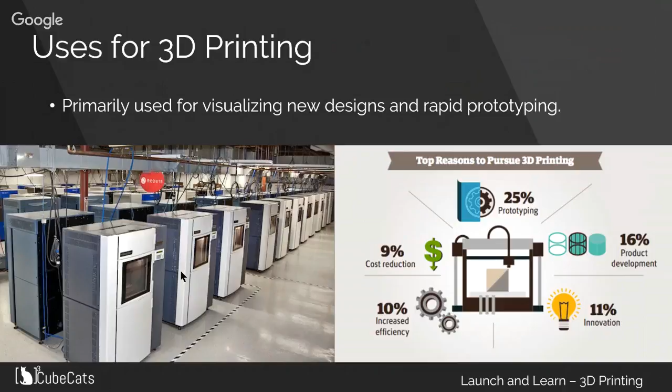So in recent years, 3D printing has become more and more popular, both by hobbyists and also industry professionals and companies. Its primary use has been creating new designs and visualizing them, as well as using it to rapid prototype new parts before they're put into production. On the right side of the slide here, you can see, like I said, 25% of the reasons companies use 3D printing is for prototyping, and the rest are along the same lines of product development and just creating new things fast, quick, and cheap for their company.

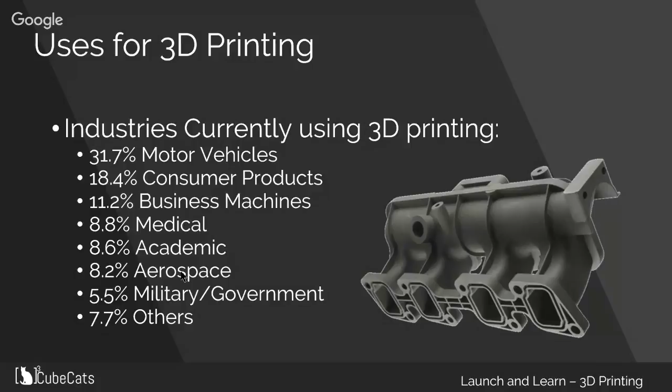On this slide, there's a breakdown of the industries that use 3D printing regularly. On the top is motor vehicles, the automotive industry, which is 31.7%. This statistic, I believe, is from 2015. So since then, it has probably changed somewhat. If I had to guess, aerospace and medical would be much more towards the top, with the integration of it into prosthetics and airplanes and even the space industry.

So there's 6 main types of 3D printing. We're only going to go through the top 3 on this slide, which are fused deposition modeling, stereolithography, and digital light processing. 90% of the time when someone says 3D printing, it'll be one of these 3, specifically FDM, because it's the cheapest. And when you think of 3D printing, you think of FDM.

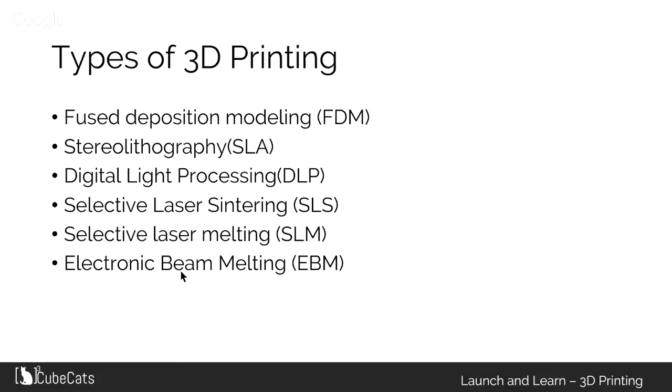So FDM printing is extruding a piece of melted plastic onto a print bed and slowly building up a layer by layer at a time. This was one of the first types of 3D printing, and MakerBot was the company that really brought this to light and brought it from the world of companies and industries to people's houses. And it was the first time people were able to buy this technology and use it in their homes. Accuracy on this is 100 microns or 0.1 millimeters. That basically means the minimum layer height you can have is 0.1 millimeter. Most of the time printing, you use a 0.2 millimeter layer height.

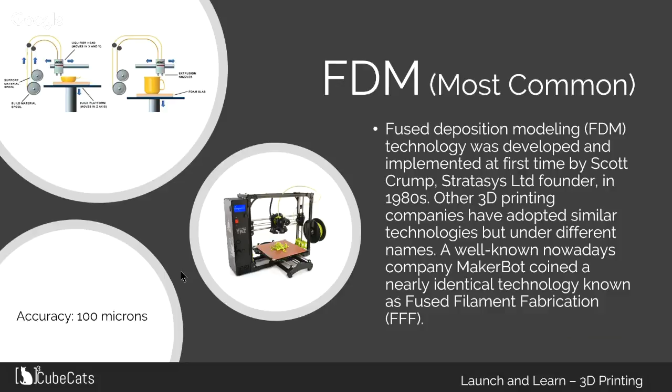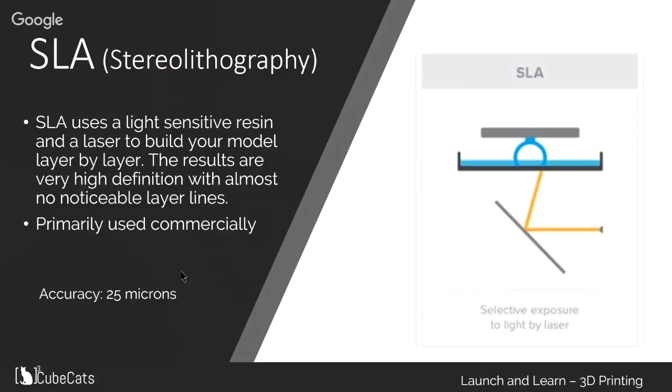So the second type is SLA, or stereolithography. It uses a laser and a moving mirror to shine the light onto the bottom of a clear build surface that's submerged in resin. And when the laser light hits the resin, it hardens and it builds the layer up layer by layer that way. These parts are very high definition and incredibly strong. They're as strong, if not stronger, than an injection molded plastic part. And the accuracy with this type is 25 microns, which is 0.025 millimeter layer height. It's practically invisible when you see it. It looks like an injection molded part.

The last type is DLP, or digital light processing. This uses a UV projector, kind of like SLA, where it shines it onto the bottom of a clear print surface that's submerged in resin. When the light hits the resin, it hardens and the print surface slowly moves up and basically pulls the object out of the resin. It is a little bit less accurate than SLA. However, it is much faster, and the accuracy really depends on the projector you have. So very expensive commercial printers will have very expensive projectors which have a lot of accuracy, whereas if you buy a cheap desktop DLP printer, you might not have the same accuracy, but it'll still be much better than FDM printing.

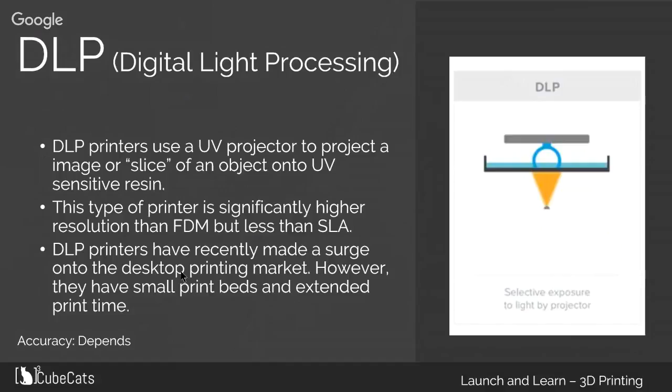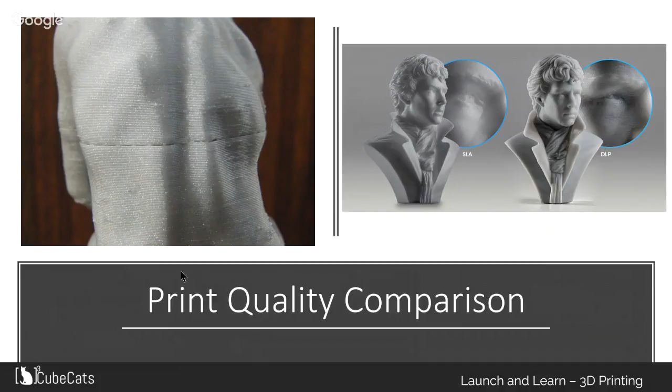On this slide, I have a print quality comparison between FDM on the left and then SLA and DLP on the right. With FDM, you can see the characteristic layer lines of plastic, and then you can even see lumps and other imperfections caused by the nozzle moving around or other various setting issues. In the middle, there's SLA, where you can see the practically invisible layer lines. And then DLP is on the far right, which has a little bit more distinguished layers, but it's still much better than the FDM prints.

So since FDM is the most common type and the type that everyone associates with 3D printing, that's what we're going to talk about the most during this presentation. There are two main types of FDM printers, Cartesian and Delta printers.

Cartesian printers use an XYZ straight axis, and they move the print bed and extruder accordingly. These are by far the most common, and a majority of the kit printers you see, such as the Prusa, are all Cartesian because they're very simplistic and easy to assemble, and the settings are much more understandable than Delta printers.

Their build volume is usually a square, and they can have much larger build volumes. However, they can't go as tall as Delta printers can. Delta printers usually print in a cylinder and much taller. However, the settings on them can be a nightmare, but when they are properly configured, they can have as good, if not better, print quality than Cartesian printers, and they can print much faster.

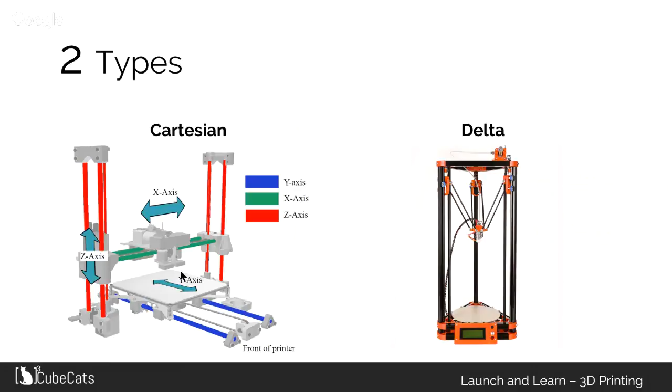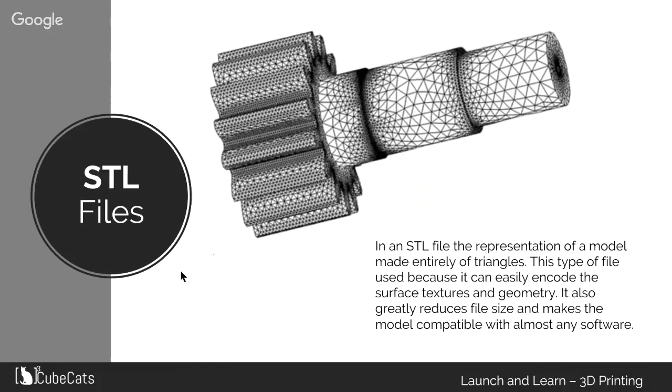So before we get any further, let's take a minute to talk about the file type that a majority of 3D printing softwares use, which is the STL file. STL is short for stereolithography, and it is essentially a model that is broken up into many little triangles. This is used because it decreases the file size while keeping the surface geometry and textures of the model, as well as it is easier for the slicing software to slice it into layers and then print it.

So there are a lot of different slicing softwares out there. Some of them are proprietary to a certain brand of printer. Other ones are open source. They all have their unique attributes, and a lot of different people like them for different reasons. In our lab, for our printer, I believe we're going to be using Repetier, which is a free software. It is relatively simple, but it also gives you enough options that you can fix problems in your prints, and you can customize the G-code to print it however you would like.

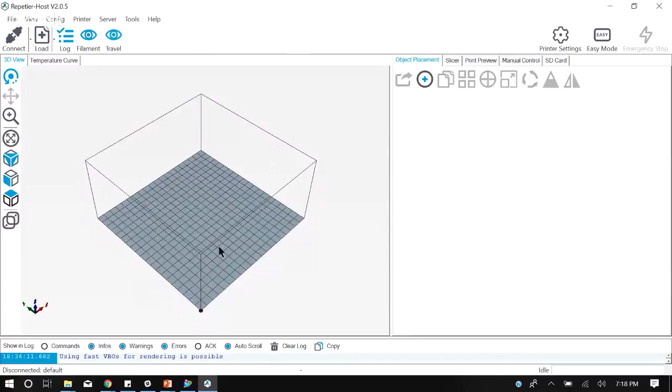So I'm going to pull up Repetier and do an example of how you would slice a file. So once you come into here, you can see you have the 3D viewer, where this square would be your print bed. And then you can add a 3D object.

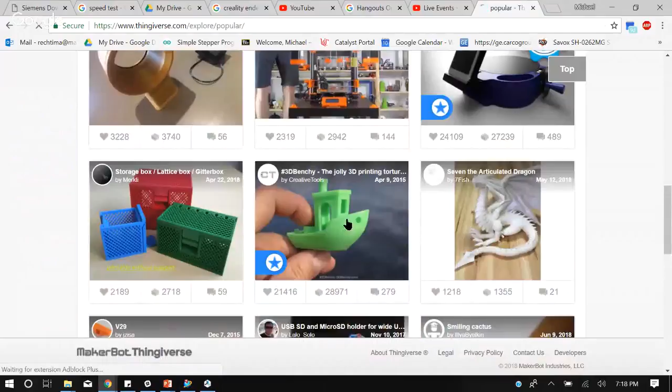So for this, you would either import your design that you just built in a CAD program, or you could go to a website such as Thingiverse or any other site where you can find 3D models. Another example is McMaster-Carr, where you can find any file ever for any fastener or pretty much anything. So this is Thingiverse. It's kind of like a social media platform for 3D printing. We're going to download this boat design.

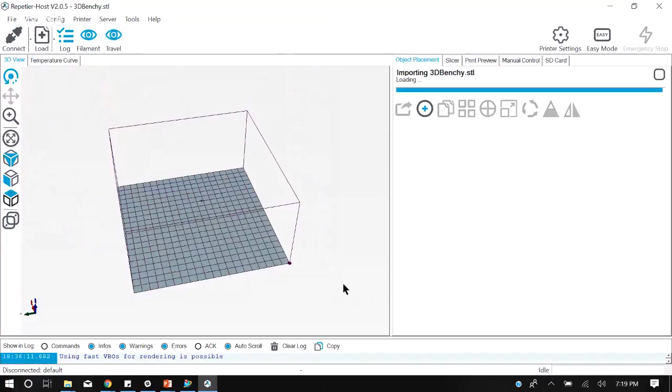And then slice it. So we're back into the slicing software, and we can open up that boat. So once you have the file placed onto the print bed, it should look just like it looked in the CAD program. If it doesn't, then you have to go back and fix it, or go through manually and fix the STL file, which takes a lot of time, but sometimes it's required.

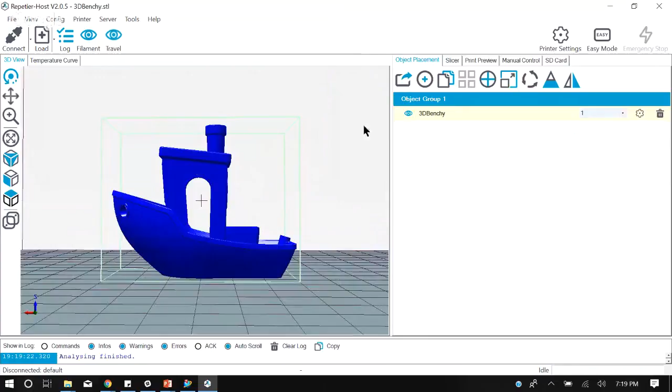And then you can go over to the slicer tab, and we're going to slice with the Cura engine. This software offers two options. You can slice with the Cura engine or slice with a program called Slic3r, and each one gives you different results. It depends on your printer which one works better, but we're just going to use Cura for this. And then through here you can change the print settings, and if you go into configuration, you have even more print settings.

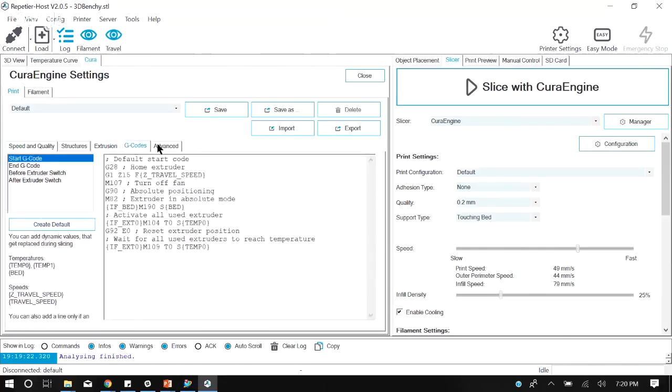As I'll say further on in the presentation, 3D printing is 10% hardware and 90% settings. If you have your settings right, you can get just as good a quality with a cheap printer as you can a good printer with bad settings.

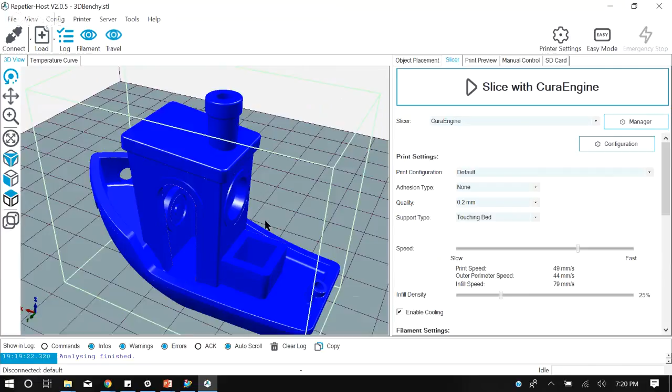Once your model's in and you are happy with it, you can slice, and it will give you a little progress bar, and then it will supply you with a sliced view of your model, and then the print time, layer count, total lines, the amount of filament it will need. You can actually customize it to also tell you the price of filament based on how much you pay for the filament.

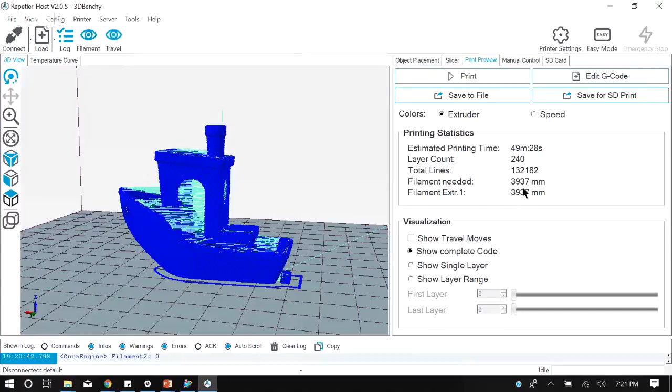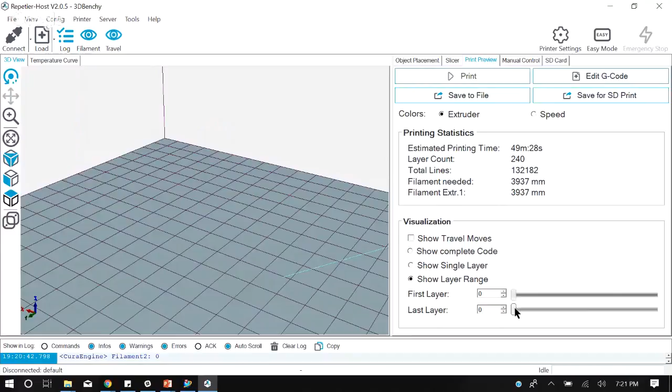There's a couple different views. This is the complete model. We can have it show a single layer. So as you drag it up, it will show us each layer all the way up to the very top, or show a layer range. So this will show it as you build it, and you can watch it build itself up just like the printer will do.

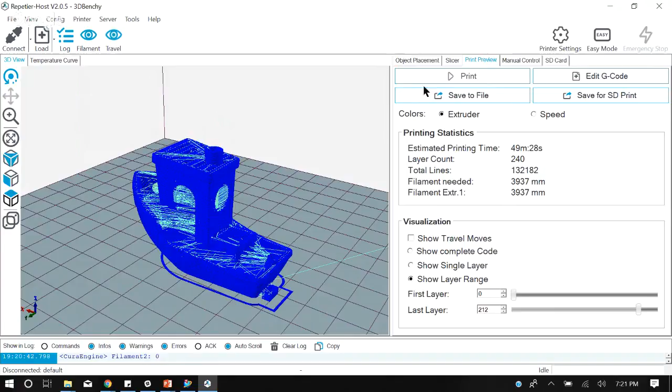Once you've done that, you can either save it to an SD card and put the SD card into your printer and print via that, or you can press the print button, and if you have a printer connected to the program, it will go straight to the printer and begin printing it.

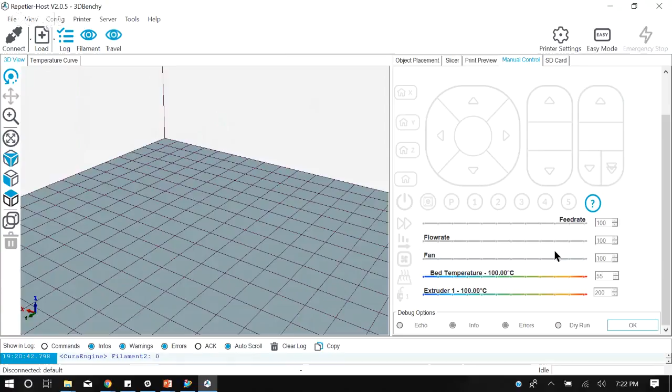The next tab over, if we had a printer connected, you can manually control the printer, so you can unload the filament or load new filament. You can change how hot the printer is. You can change whether the fan's on or not. You can speed up the print, slow down the print, make it extrude more plastic, make it extrude less plastic. Pretty much anything you want, it can do. So yeah, that is Repetier, which is the slicing program we will be using.

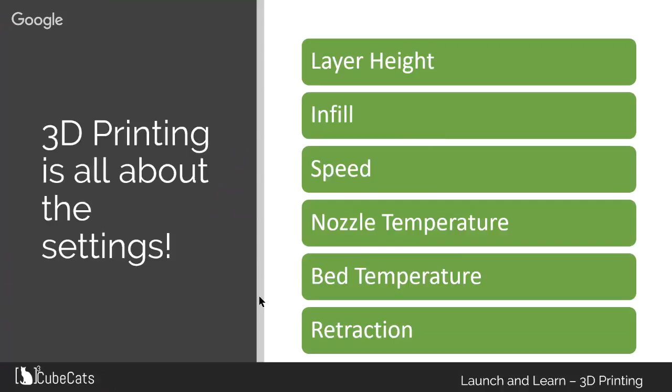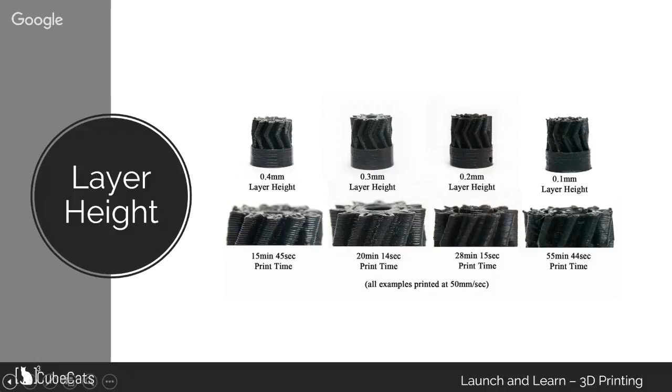Infill is the next setting. Infill mostly relates to how strong the print is and how much plastic you use. The higher the infill, the stronger the part will be, but the more plastic you use, which makes for a more expensive print, and it will also take longer.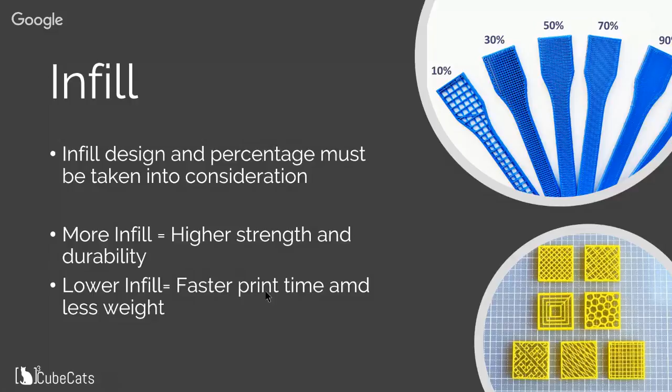However, if you're printing a moving part or something that has tolerances in it, such as a mechanical part, they will be off and the part may not work.

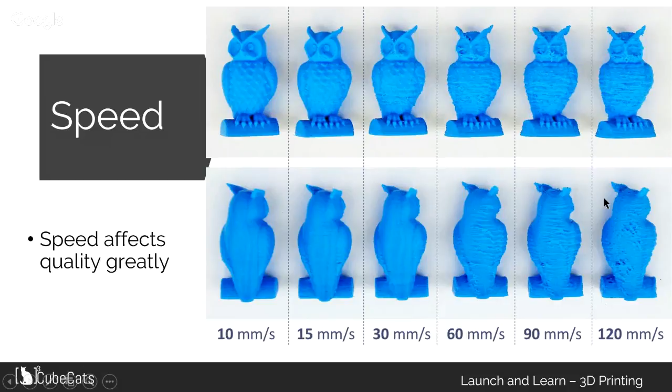The next is temperature. Temperature is mostly dependent on what type of filament you're printing with. PLA is by far the most common filament. It's a low temperature plastic, which is more brittle than a plastic like ABS, but it is plenty strong for a majority of applications, and it is very fast and easy to print with. It also does not shrink, and it does not tend to warp as much as a plastic like ABS does.

They also have started to make specialty filaments, which have carbon fiber or wood or even ceramic infused into them, which can give your print a pretty cool feel. Or if you print with something like wood, you can sand it and it will sand like wood does. The carbon fiber prints are very light, and it doesn't offer you much of a strength benefit, but it does make it much lighter, and it's cool to say that's carbon fiber in it.

Also, flexible filament has made a huge surge into the industry recently. It offers printers a whole new sector to evolve into, whereas things used to just have to be rigid parts, but now you can print it and then bend it, and it's made a whole new world of possibilities possible for 3D printers.

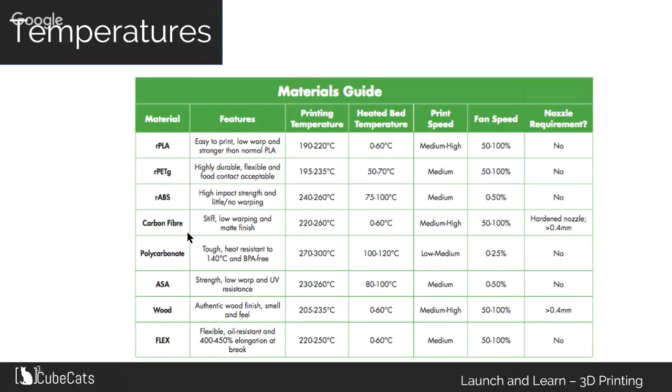Retraction is, I believe, the last setting we're going to talk about. This is essentially the print head pulling the filament back, reversing it up the extruder while it travels between objects. So that prevents it from dripping or extruding a small amount of plastic between objects.

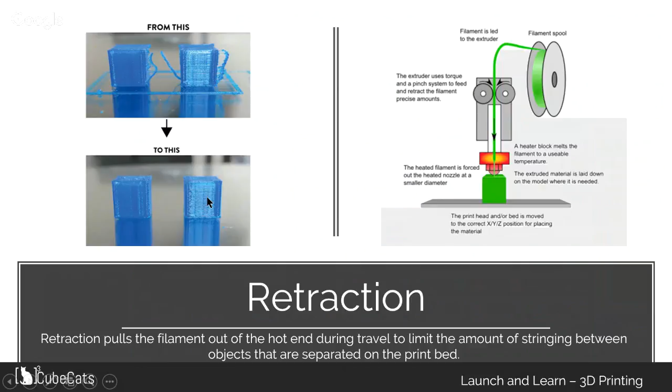So the top here, you can see that when it was printing this, as it traveled between the two squares, some of that plastic that was left on the extruder dripped off and created this protrusion from the plastic. But moving down to the bottom, when you turn on retraction, it sucks that plastic back up and doesn't allow any to drip between. This gives you much cleaner prints and a lot less post-print work.

A large part of 3D printing, a very important aspect of it, is when you're designing something for 3D printing, you have to keep that in mind while you're designing it. There's a couple things you have to watch out for. The first one is bridging.

This isn't a big deal for some prints, but again, if you're printing something with tolerances or exact measurements that's going to have other pieces that interact with it, it may not work in the end. Or you might have to do a whole bunch of post work with a file or whatever.

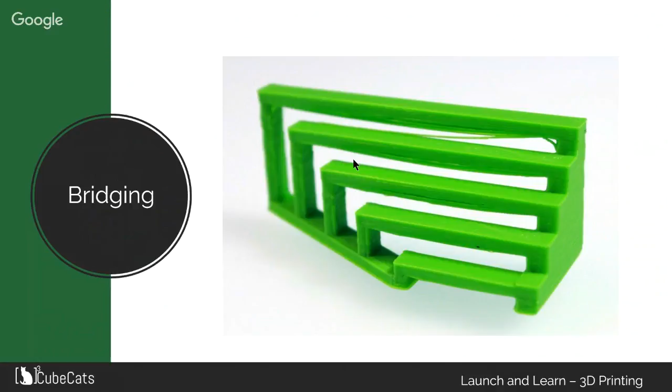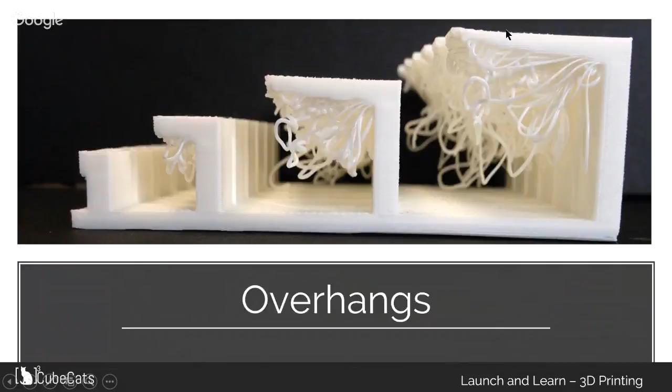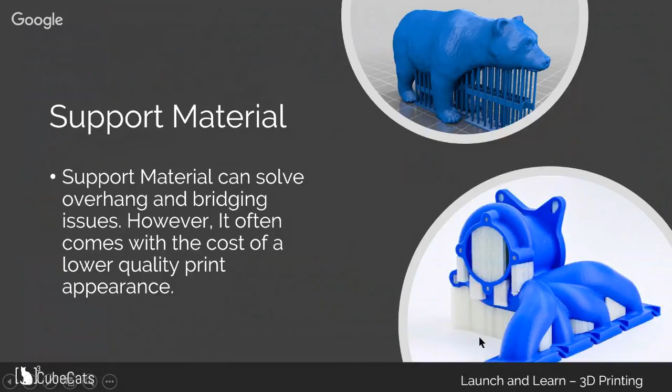So tolerances and shrinkage. Tolerances depend mostly on what printer you have. The higher quality the printer, in general, the more precise it will be, and the less tolerance you'll have to build into your design. However, if you're using materials like ABS or some other types of filament, you'll have to allow for shrinkage, which is essentially the plastic becoming smaller when it cools down. With something like ABS, it can be up to 0.9%, which doesn't sound like a lot, but when you are trying to design a piece that moves and is accurate to a couple thousandths, 0.9% can really throw off the entire model.

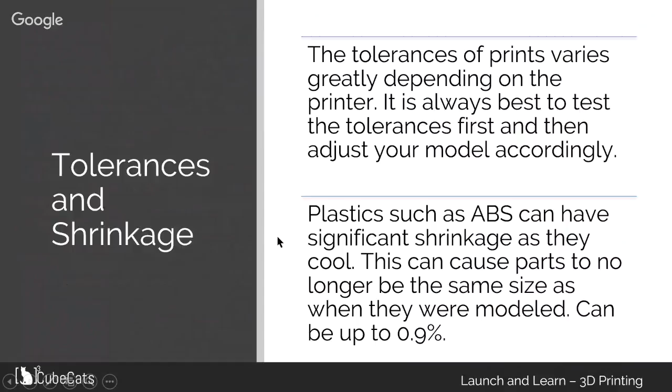The last thing is you kind of just have to be realistic. Printing can do a lot more things than an injection molding process can do. However, it's not perfect. It has its limitations, and you have to know what your printer can do and know how to either circumnavigate those challenges and print it in multiple pieces, or just work around the design complications before you print it, rather than printing something and then, when it doesn't turn out, blaming the printer. If that makes sense.

A really big evolution that will happen in the near future, if I had to guess, is metal 3D printing. It's already a thing. However, it's incredibly expensive and very slow. But I think the more that people innovate and work with the idea, the cheaper and better it will become, and the more feasible it will become.

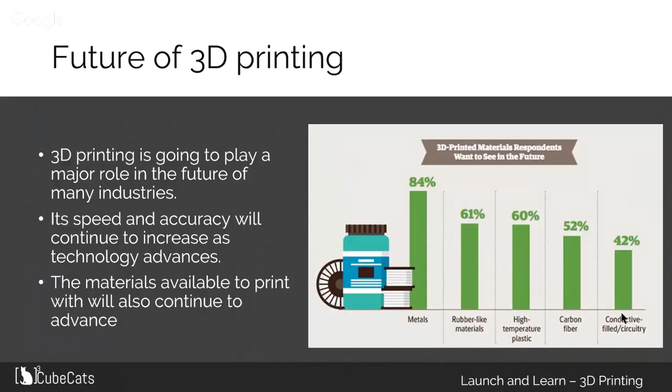Right here I have some examples of some new kind of cutting-edge evolutions in 3D printing. It was in the news not too long ago. A company has begun to 3D print houses out of concrete. They're very heavy because they're all concrete, but it's a good step in the right direction.

On the top here is 3D printed chocolate. Some very high-end restaurants have begun advertising that, and it's kind of a marketing gimmick, but you can make some pretty cool designs, and who knows, 3D printing could play a major role in the kitchen someday.

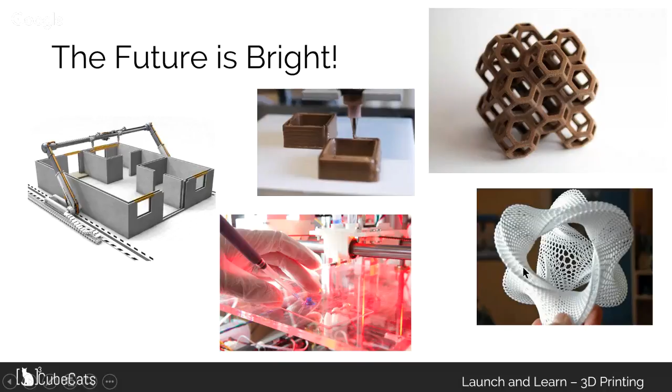And then at the bottom, there is a cellular 3D printer. For biologists and the like, it's becoming more and more common to use 3D printers in the lab, and also 3D printing technology to print cells and a whole host of other processes with the cells. On the right here is just a crazy print that was done by someone. Any questions?

I don't think he's in it anymore. Chris, any questions? Any questions?

How expensive is a 3D printer? They're really cheap. Depends on which one you get. What's the average, kit versus buying it? Like kit versus not kit? Yeah. Actually, the typical 210 by 210 by 210 millimeter print bed printers have averaged around $200. Some kits are cheaper, like 150. Some are a little bit more expensive. But on average, you can get an assembled 210 print bed printer for $200.

Once you start getting into the bigger print sizes, like 300 or 400 or even 500, you get up into the $500 range. And then if you want an enclosure for printing plastics, or dual print heads, you can print dissolvable support material. It'll print two different types of plastic, and you submerge it in acetone or some sort of solvent, and it dissolves away the support material. You have to do a lot less filing.